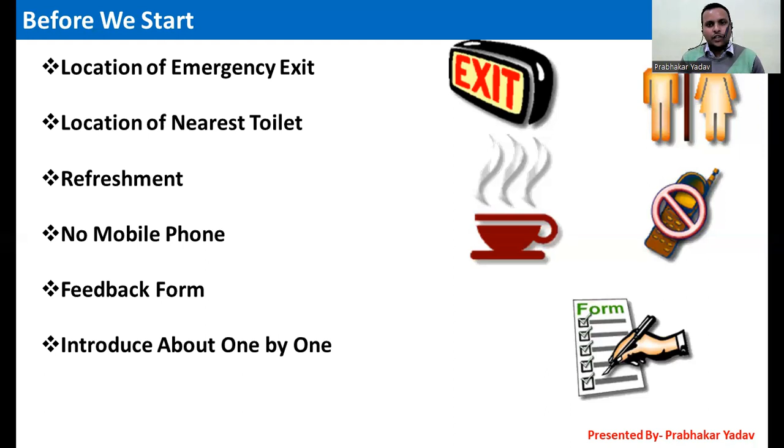Yes sir, my name is Shashiranjan Gupta. I am working as a safety officer, and I have nearly 10 years of experience in the HSE department. Thank you, sir. Which type of project are you currently working on? I am working on the smelter project, copper smelting project in Indonesia. Okay, what is the process of this unit? What is the manufacturing process of this organization? Copper. The copper. Okay, great, great, Shashi. Thank you, everyone, for introducing.

During this training session, we will cover the following things as displayed on your screen.

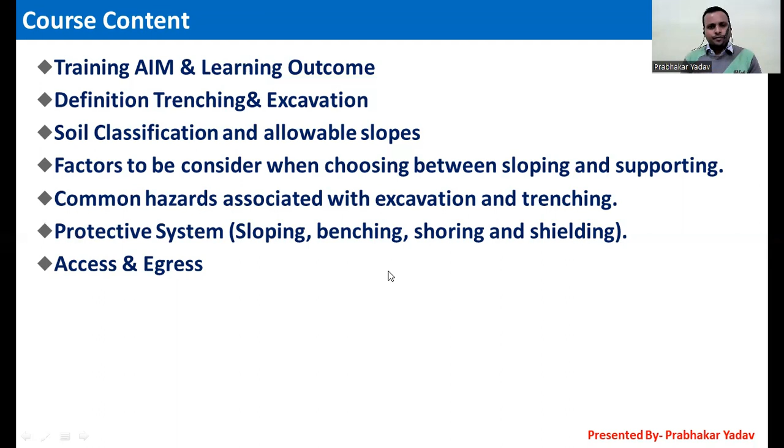What is the aim of this training? The aim of training is potential hazards. If we are going to work with excavation, then what can be the potential hazards? We will know, as the aim of this training, what are cave-ins, what are utility strikes, and how we can prevent accidents during the excavation work. And before excavation work, what are the safety rules and regulations we need to follow to create a safe work environment at the workplace? This is the aim of our training.

And learning outcome, what is the learning outcome of the training? At the end of the training session, you are able to explain the hazards, which types of hazards can be created during the excavation work, what are the protective methods like shoring, shielding, benching method, which types of soil classification, and what are the allowable slopes during the excavation. You can easily understand and explain to someone.

Okay, and you can also take precautions during the work of the excavation at your workplace, and how we can prevent accidents and injuries during the excavation activities. After the training session, you are able to explain all these things.

Okay, so before proceeding with the training, I would like to ask, what is excavation? If anyone knows, please. We will discuss the excavation, but I want to know what is excavation. Can anyone please? Yes, sir. Removing soil below the ground level through manual or mechanical means is called excavation. Okay, great, great. Thank you, Shashi. Thank you, sir.

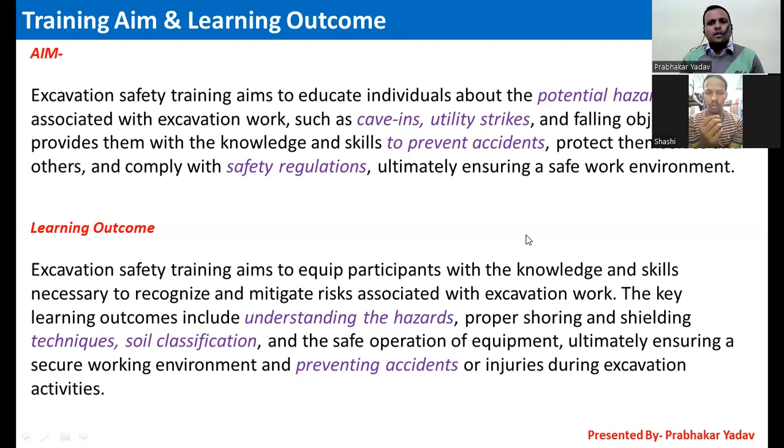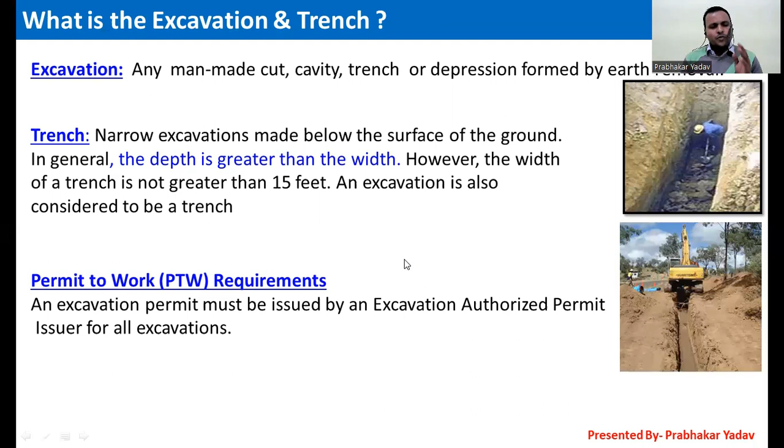Before going to start the excavation work, we need to obtain the permit to work, PTW, from the authorized person. Why does it need to be considered? Because there is a chance of pipelines, water pipeline, gas pipeline, electrical cable, and many types of utility cables. So that's why we need to take the PTW before going for excavation from the authorized department, authorized person.

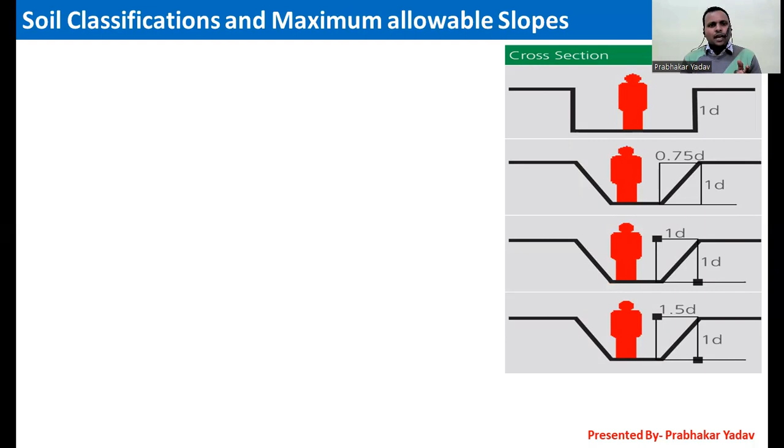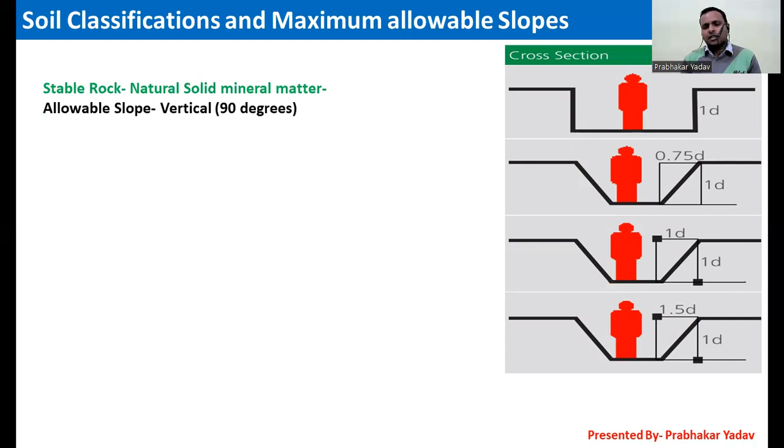Okay. We will also discuss the soil classification and maximum allowable slope. How many types of soil classification, and how many degrees is the allowable slope for the specific soil? We will see. As you can see, the first one is stable rock, natural solid mineral matter. Our maximum allowable slope is 90 degrees. As you can see in picture one, if there is stable rock, then we can excavate the soil at 90 degrees.

And there is type A soil. Type A soil means cohesive type, such as clay or rock. It's a mixing of clay or rock. Its maximum allowable slope is 53 degrees. And type B soil, a less cohesive soil, a mix of sand, rocks, and clay, will be considered type B soil, and its maximum allowable slope is 45 degrees.

Okay, and the last one is type C soil. Least cohesive soil such as gravel, sand, mud, or freely seeping soils that are not stable. It's called type C soil, and its maximum allowable degree is 34 degrees. Okay, anyone have a question about this? Please ask if any question.

Yes, sir. I have a question. Yes, please. After how many meters depth do we require a confined space PTW? Okay, great question. Thank you, Shashi. Sir, thank you for the question. If the depth is 1.2 meters or more than 1.2 meters, then we will consider it a confined space, and we need to obtain a confined space permit to work from the authorized agency. Hope you are clear. Yes, sir. Thank you, sir. Okay, great.

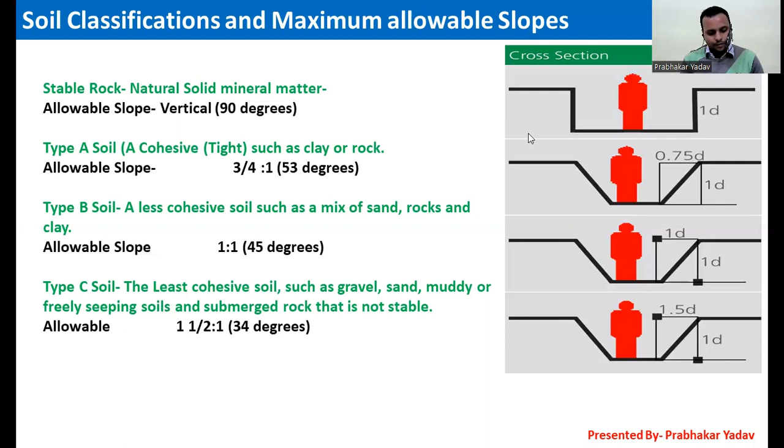Factors to consider when choosing between supporting and sloping. When we are choosing between supporting and sloping, we need to consider soil classification, which types of soil we are going to provide the support for, size of area, how much depth, how many square meters, and how many meters depth of the excavation, weather conditions like

lightning, any storm, rainy season, we all need to consider, and work duration, how many hours people are going to work inside the excavation, and any adjacent structure nearby the excavation. Disturbed soil means any soil which has a chance to fall in the excavation, like cave-ins. So all these factors need to be considered when we are going for supporting and sloping.

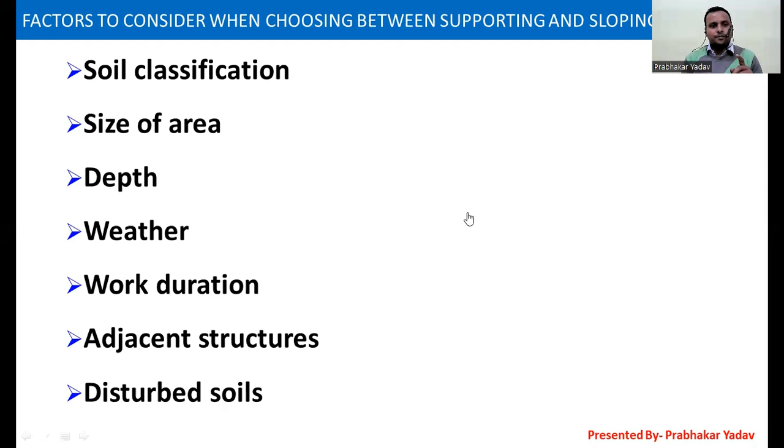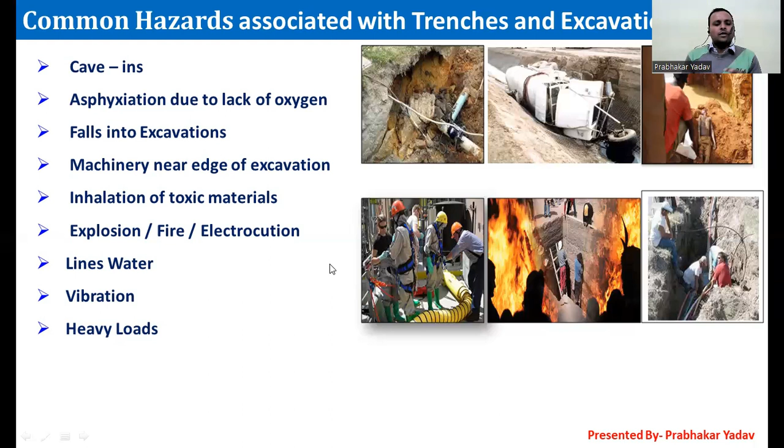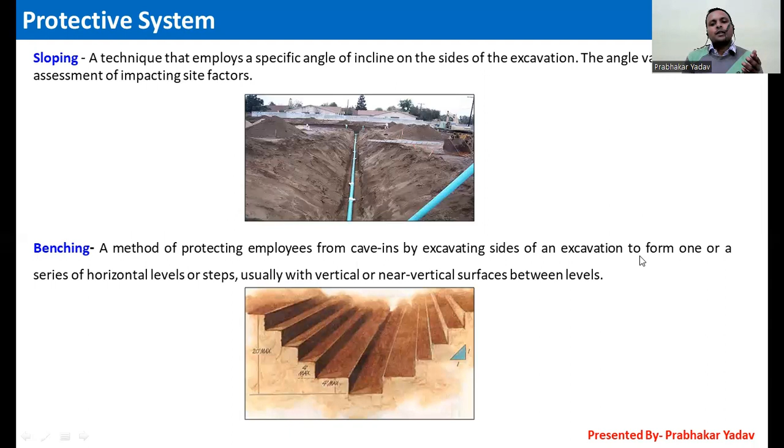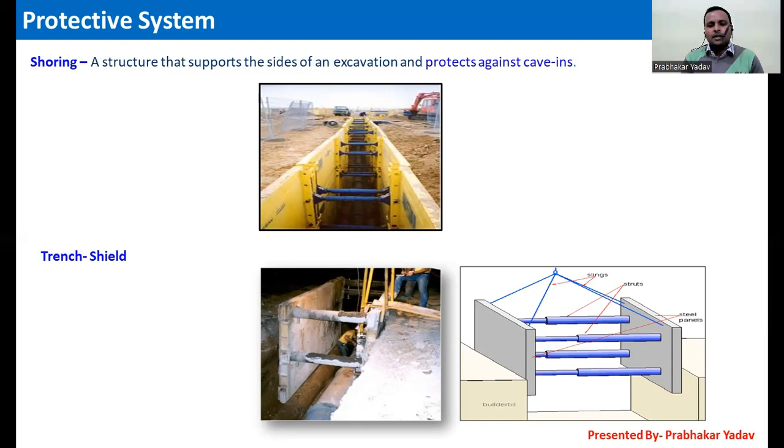The third one is the shoring method. As you can see in picture one, it uses barriers between the two sides with proper pipes as ties across the trench. And the fourth one is the trench shield. This is mostly used for trenching excavation, as you can see in pictures two and three.

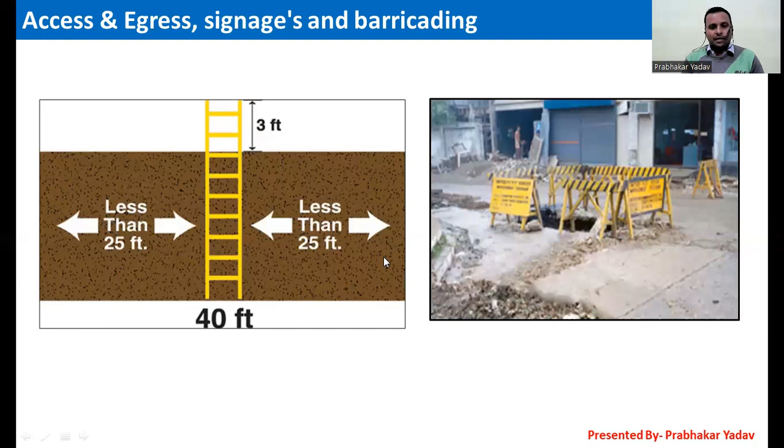If we are going to work inside the excavation, we need to provide access and egress. As you can see in picture one, the portable ladder must be 3 feet above the ground. And after all the excavation work, we need to barricade the excavation area. As you can see in picture two, display signage boards, paste radium signs for easy visibility at night, and hard barricade the excavation area. That's all about trenching and excavation safety.

If anyone has a question, please ask me. Yes, sir, I have a question. How many types of protective systems are there? As we recently discussed, there are four types of protective system: sloping, benching, shoring, and shielding. Hope you are clear. Okay, sir.

Thank you. I want to ask a question to all of you. How many types of soil are there? Yes, sir. Stable rock and A, B, C. Good, type A, type B, and type C. Great, thank you, Sasi.